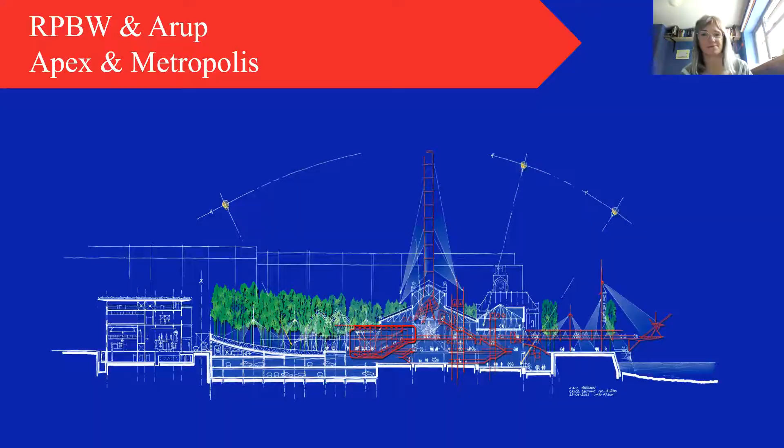As one of our clients was a major shareholder of the Russian gas company Novatek, it was particularly important to him to incorporate sustainability in a really visible way, which then interestingly set up a narrative about transforming an old coal power station, as you can see up here, into something representing the future of energy.

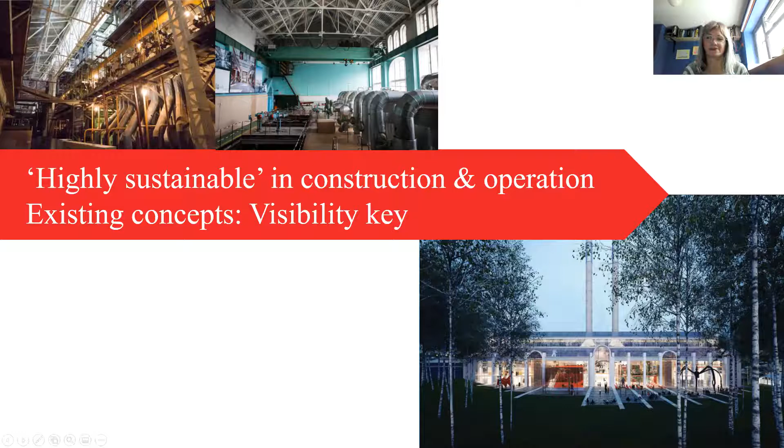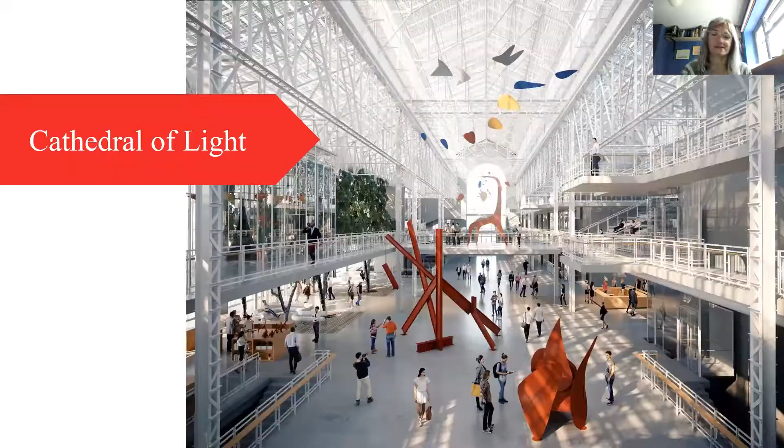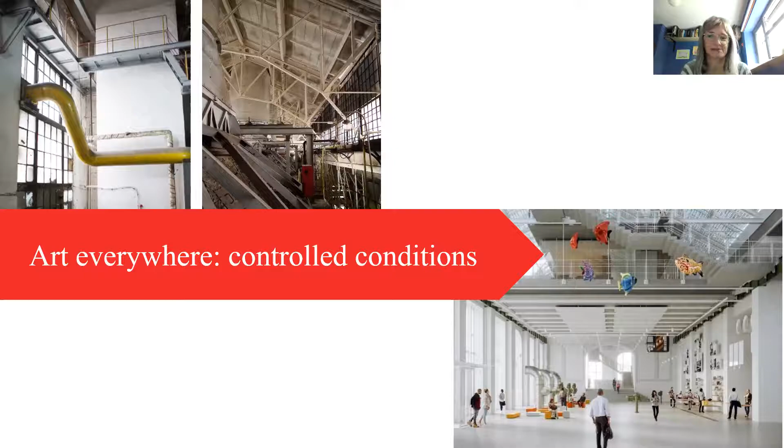So a key architectural concept that already existed from Renzo Piano Building Workshop was to take off the existing roof of the power station and replace it with glass to form a cathedral of light. And the brief was to be able to put art everywhere. Much contemporary artwork is sensitive to environmental conditions and needs a controlled environment to conserve it with constant temperature and humidity and limited light exposure. So this creates a real challenge. And of course, the building's in Moscow, which has an extreme climate with winters that get down to -25 degrees C.

So today I'm going to focus on the broad early stage sustainability and environmental concepts in development in response to the site and the key challenges that I've just outlined. I thought it'd be quite interesting to show you the process responding to existing concepts and then working through opportunities to make them into reality. And then I'll hand over to Andy, who will illustrate some of the more detailed multidisciplinary collaboration that made the concepts really work.

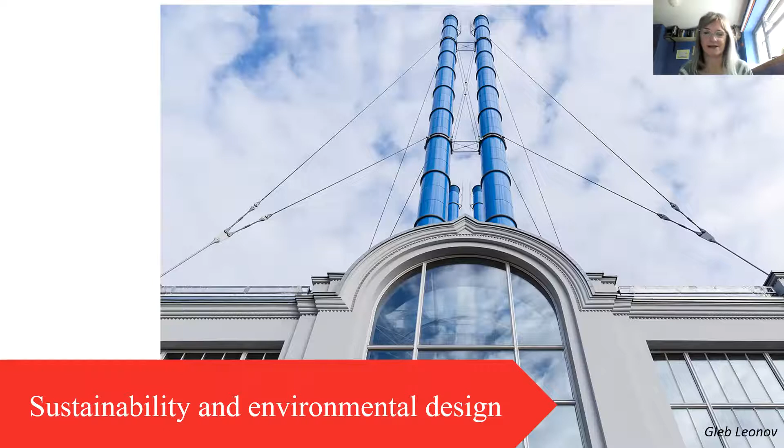So as we joined the team, slightly after everything started, we immediately had to do lots of thinking. How do we make this old power station into a sustainable world-class arts and culture venue? Or how do you minimize operational carbon for a contemporary art center in Moscow built out of an old power station with the roof replaced with glass, which wants to be able to put art everywhere? Quite a challenge. And immediately, after much discussion with Renzo Piano, it was quite clear that the vision of the glass roof was absolutely immovable by both him and the client.

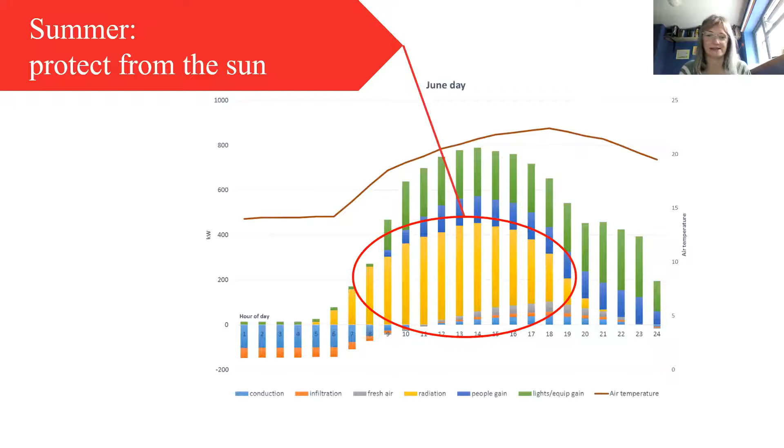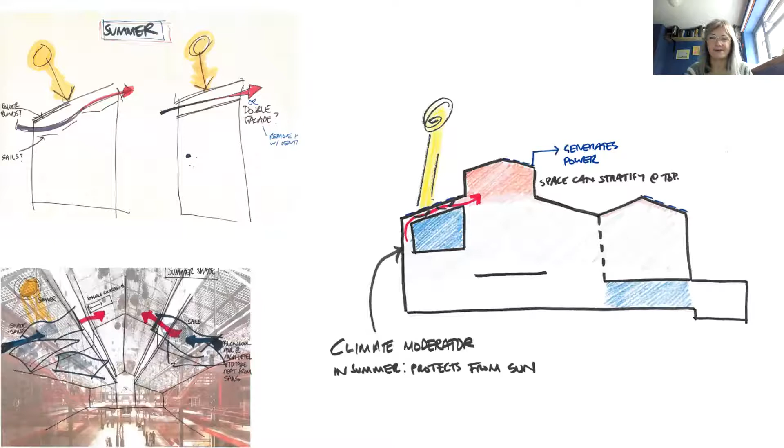So we sat down with a pen and a paper and a little bit of Excel and really thought about what we had here. So in summer, it's quite clear that with a glass roof, the solar gains dominate the design by far. The key is to protect what's inside the building from the sun. How do we deal with the heat from the glass coming from both the sun and the air? Should we ventilate the facade? Can we use the rising heat and the height of the building to help us?

We concluded that essentially the envelope of the main building is a climate moderator, but it can't do all the work. So we thought that putting art enclosures within that main envelope was key to the success of the project. We also needed to think closely about heat rejection, how to capture the useful waste summer heat for dehumidification required for gallery conditions, and also for the hot water for the various different uses in the building. And of course, the large roof area with a significant amount of sun allows us to generate quite a lot of power over it.

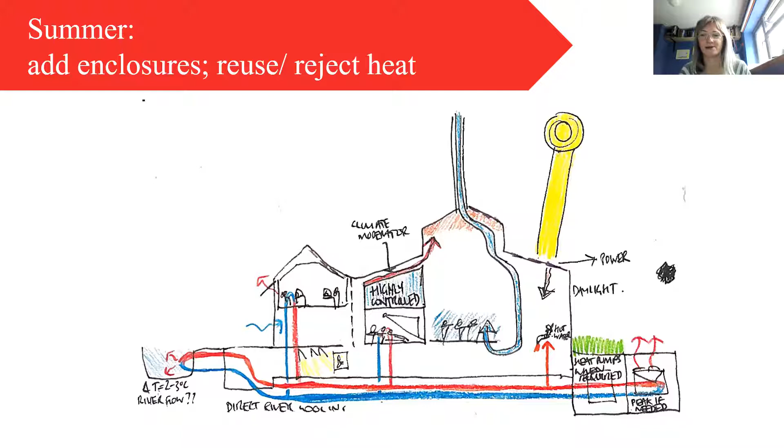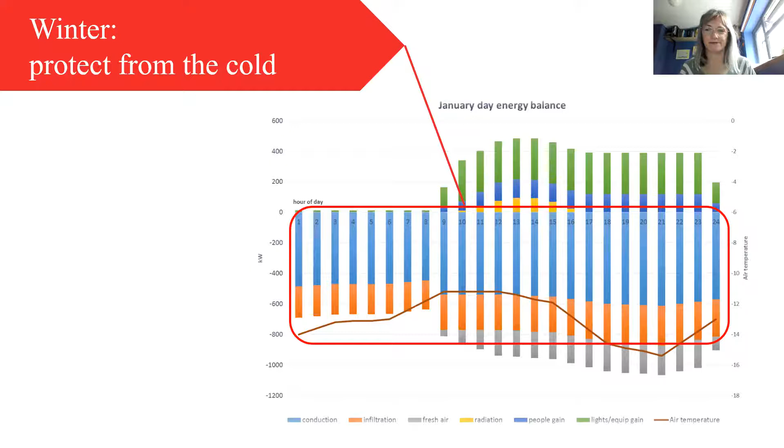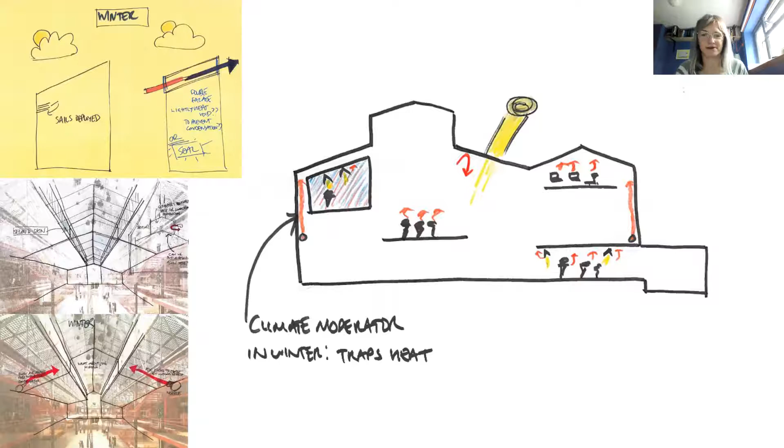So in winter, the most important thing is how cold it gets. The outside air is the key issue. The conduction from the facade and any air leakage losses really dominate the requirements of the building. So any heat we can trap inside is key. And now we want the envelope to work really, really hard to moderate the climate by containing the heat and the moisture inside it. But condensation and comfort are really critical at the outside of the building, where it's -25 outside sometimes, remember. And also this is even more critical if you want to humidify the air inside to protect the sensitive art.

So the heat for the building is a given that it's provided by the city district heating system. So the key really to sustainability here is to use it as efficiently as possible. And again, in the winter, we concluded that art enclosures and an assessment of the wider brief to zone conditions would be key to a truly efficient design.

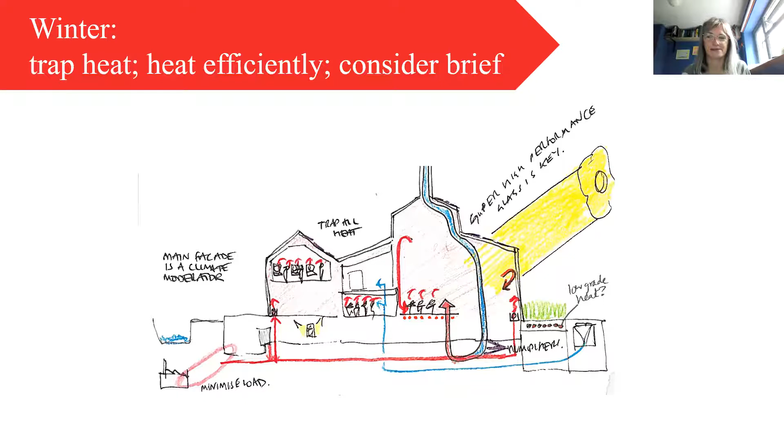Now, putting art everywhere, this really creates a burden of air conditioning in a building this large, especially with the humidity control that you need and the humidification you require in the very dry Moscow winter. This led us to really discuss with the client about the brief and whether they really wanted this. They wanted to be able to borrow other people's contemporary art for shows that would come with a requirement to demonstrate that the environment it was going to be put in would meet the exacting environmental requirements.

And it was clear this is going to be really challenging, highly energy intensive, and not in line with the sustainable brief. And also we even had a question if this is really going to be possible in all locations. So we needed to address this and change the brief slightly to apply limits to where it was going to be possible to put art.

And the other key issue for art conservation is light. Light, as I said, is key to the architectural concept to provide somewhere bright and really happy for the visitors. But much contemporary art cannot be exposed to high light levels for too long, and certainly not to direct sun, even with these shadows. So daylight admission to art galleries has to be controlled to achieve the conservation requirements.

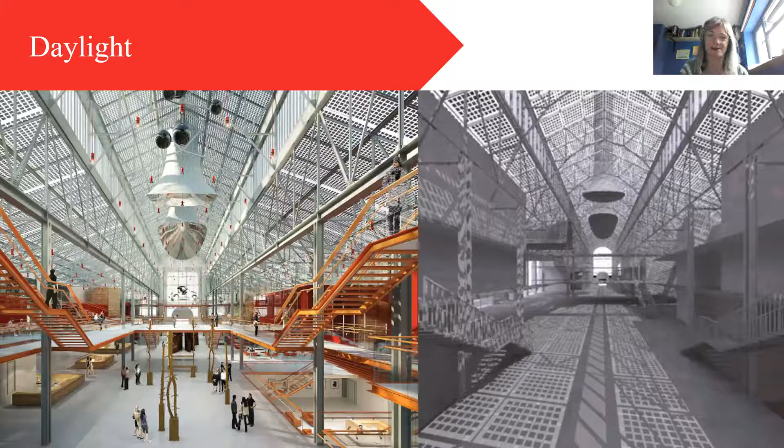On the other hand, daylight allows us to save electric light energy. Our design for VAC uses LED lights with Bluetooth mesh control technology, which allows individual control of each light so that only the right amount of light is delivered, and it's based on how much daylight is available at any one time.

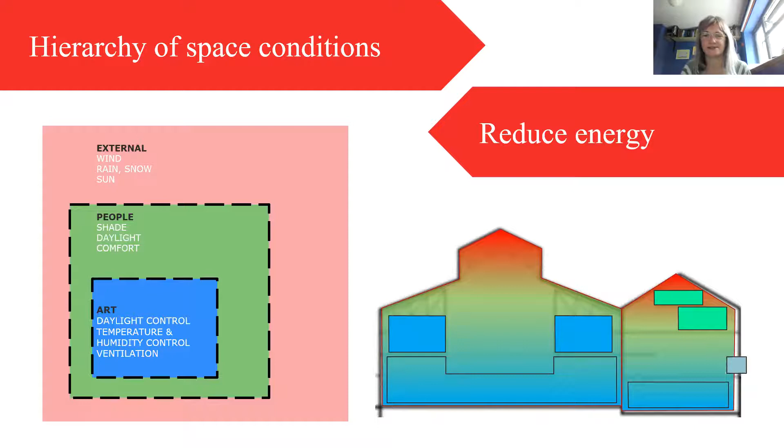So back to that brief. What we did was develop the concept of a hierarchy of space conditions. The main envelope was a climate moderator, and then there were art boxes inside it, meaning that we could, in most of the space, just provide comfort conditions for people. And then within the art zones, we could control them to much closer conditions. This means that we reduce the amount of area and also potentially the amount of time that we need to control to such energy intensive conditions.

So to do this, we defined 3 different space types in terms of light levels, cumulative light exposure, temperature, and relative humidity. The sensitive display type G1 has very low light levels and a very tightly controlled temperature and humidity band. There's an intermediate gallery type, which has daylight and slightly wider conditions. And then the rest of the building can show art, but it must be insensitive.

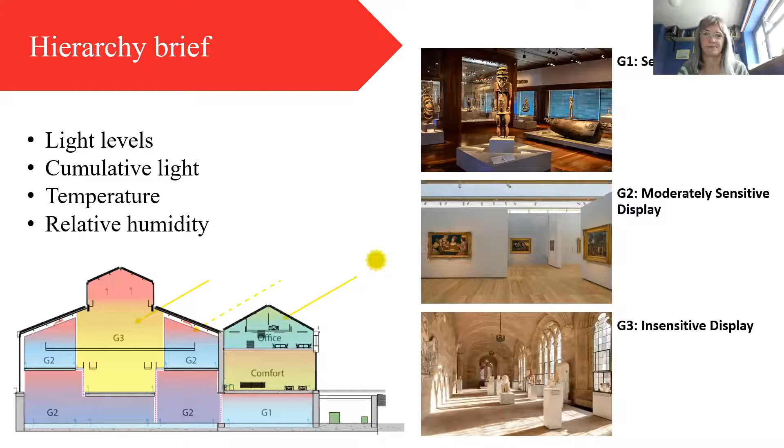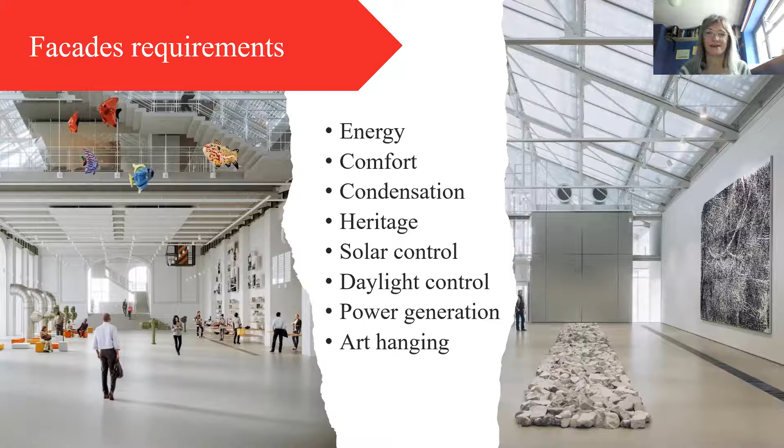So the facade of this existing building has an awful lot of work to do. It has to reduce energy consumption, provide comfort, prevent condensation. Also, the building was listed, so we had a heritage requirement. It needed to control the sun, to control the daylight, to generate power, and also to hang art on the inside of it. It's a very hard-working facade. And as a result, it became quite a layered system with all of its own challenges that I'll be leaving to Andy to tell you more after this.

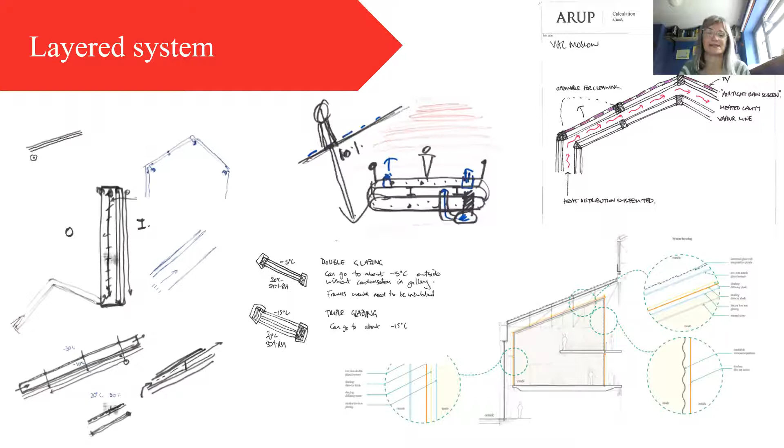It's interesting to understand that we actually didn't fully insulate the existing solid walls. This is partly because they're 1 meter thick, which actually gives them U values quite similar to glazing, and they form a relatively small percentage of the whole building. The window and the roof performance really dominate the overall. We couldn't insulate them externally for heritage reasons, and insulating them internally created potential issues with freezing of the existing brick due to the high levels of internal humidity.

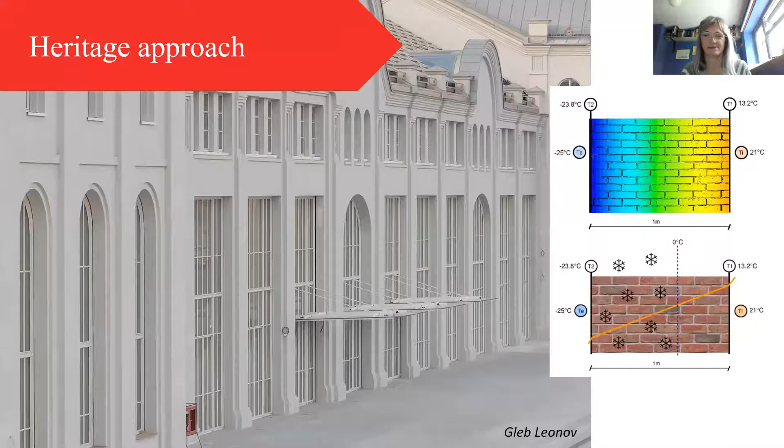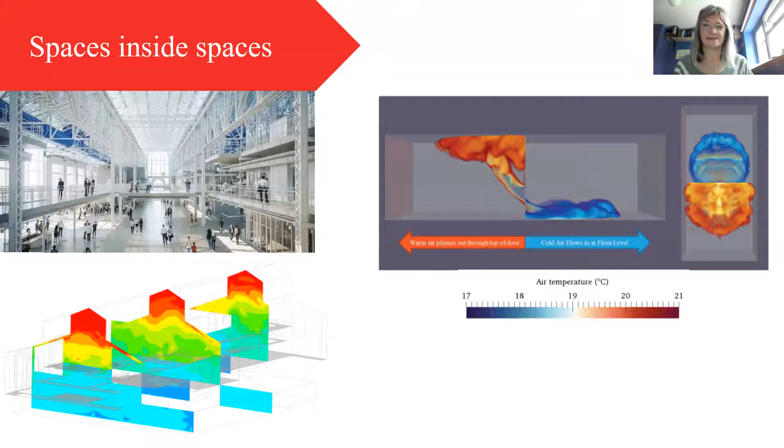The large open area has a large range of conditions. You can see the image on the bottom left showing the stratification of the space in the summer. The concept of having art spaces inside this created its own challenges. One interesting one to show you was the potentially large environmental changes at internal doors. And we looked at how much impact this would have on the galleries when doors were used. This analysis allowed us to provide guidance for where you located sensitive artworks, meaning that you didn't have to have additional lobbies.

So the chimneys, this is a nice story to give you a sort of flavour of what happens when you come to a project not quite at the beginning. The previous consultant had proposed turbines at the top of the power station chimneys driven by natural ventilation. So the power station chimneys themselves are quite interesting. You can see the original ones made out of brick, and then later steel. And originally Renzo Piano Building Workshop were intending to keep them, but actually they eventually ended up replacing them.

So the turbines driven by natural ventilation were definitely not a good idea. Natural ventilation is not great for art conservation or climate control in Moscow, and actually they really weren't going to generate very much power. So the next idea was to put wind turbines at the top of the chimneys. These were quite desirable to the client because they were quite a visible, sustainable technology. But putting a wind turbine at the top of a chimney of an occupied building with a glass roof creates maintenance issues, a risk of injury from blades falling, which is a real problem. And then also they really don't create very much power, so it wasn't a great plan.

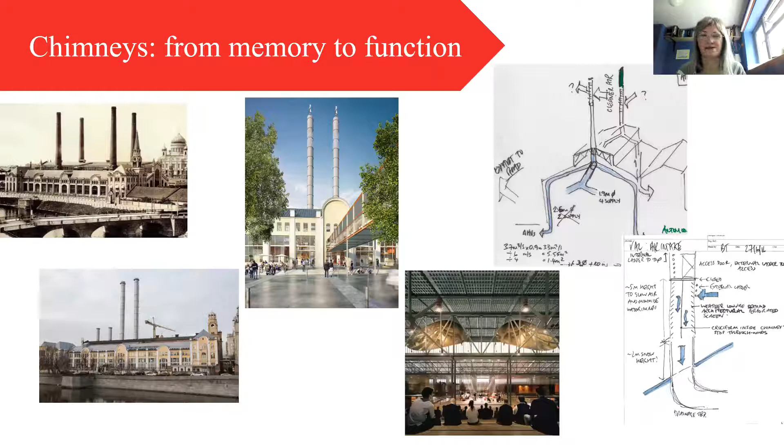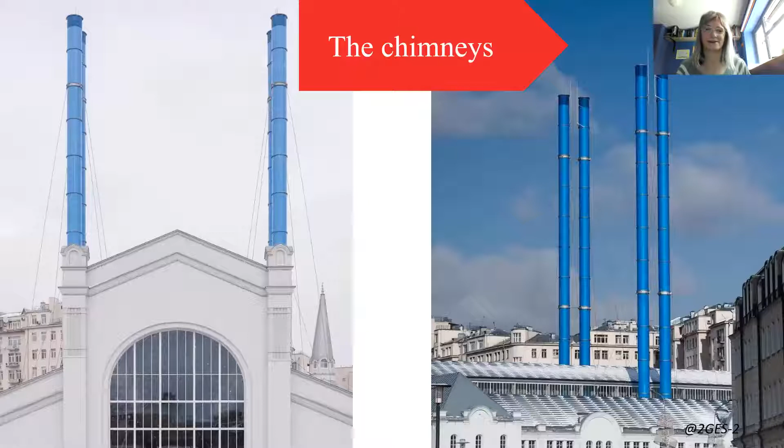But these chimneys, as I said, are quite an important part of the architecture, and it was quite important that we tried to make them useful. So in the end, what we did was we used them for air intakes. They take good quality air from above the polluted air in the center of Moscow. And here they are, the new chimneys. You can see they're really important aesthetically as an icon of the building. And actually they do generate much healthier air. And if you look at the GES-2 Instagram, you can see that they really are quite emblematic of the building.

So in summary, for the design, what we tried to do was do things that really actually were sustainable as well as being visible and truly made a difference to the performance of the building. From an already energy efficient baseline, we made approximately a 38% reduction in energy consumption with the measures I've described. Quite difficult to calculate carbon because the district heating supply in Moscow doesn't have that information available. But the biggest step change we made was changing the brief not to have art everywhere, and then improving fabric, capturing reject heat from cooling, and of course the solar power.

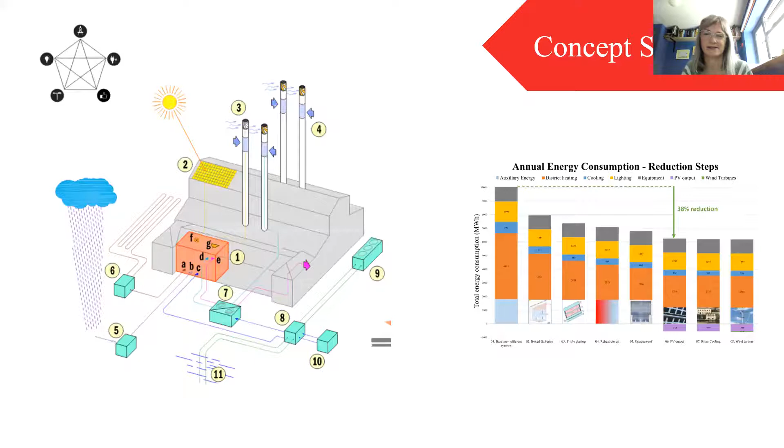We are on track to achieve LEED Gold, which in the context of the Russian construction industry in 2016, when we started this project, was quite a radical thing to do. It's quite important to the client to have an internationally recognized standard, a sort of badge for his building. Although again, because we weren't involved from day one, this was trickier to achieve than it would have been if we'd been on that journey right from the start. It's been quite challenging to deliver this because the delivery team were not familiar with it, and there's a language barrier between the LEED process and the engineers working on the job to deliver it.

So I guess the most positive story about this is how important it's been, because the client is really invested in the outcome and to get this badge for the building. And we remain involved in checking and upholding the sustainability design concepts all the way through to delivery, which means that they actually have to get delivered. And in the end, as well as the 38% energy savings I described, the building is doing pretty well because it saves 55% of the existing fabric. And it's actually added a lot of biodiversity that you can see here to an existing industrial site. There's a whole birch forest being planted. It's also got a large sustainable urban drainage system and rainwater recycling.

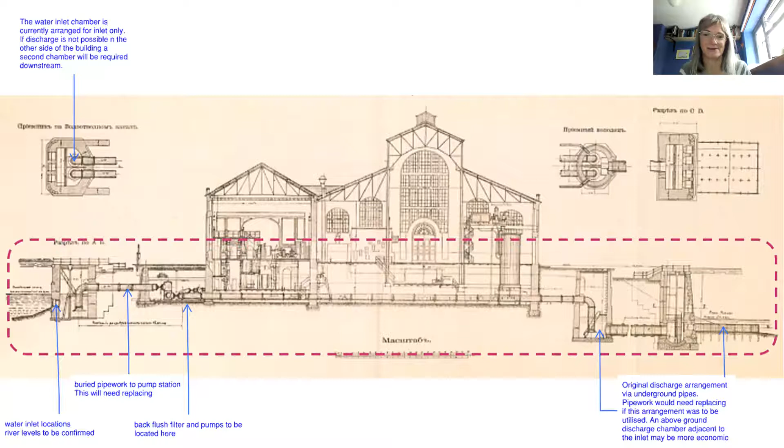One of the design concepts that got away that I thought would be quite nice just to show you was we looked at trying to reuse the power station cooling infrastructure, because the building sits between the Moskva River and the Vodootvodny Canal, but this proved impractical to do in its current configuration. Essentially, the water used to run right through the power station. But I thought it'd be just quite nice to share this historic diagram. We did try quite hard. We were quite excited about this concept at one point.

So thank you for listening. That was essentially what happened right at the beginning of the project. And now I'll hand over to Andy to show you what happened next. Thank you. Thanks very much, Becky.

I'm Andy Mackay. I also work for Arup in the buildings team, and I led the Arup multidisciplinary team from scheme stage through project and tender, which are Russian design stages, right through to our start on site. And I'm going to talk to you a little bit about delivering some of those concepts that Becky described, and particularly focused on the creating of the galleries.

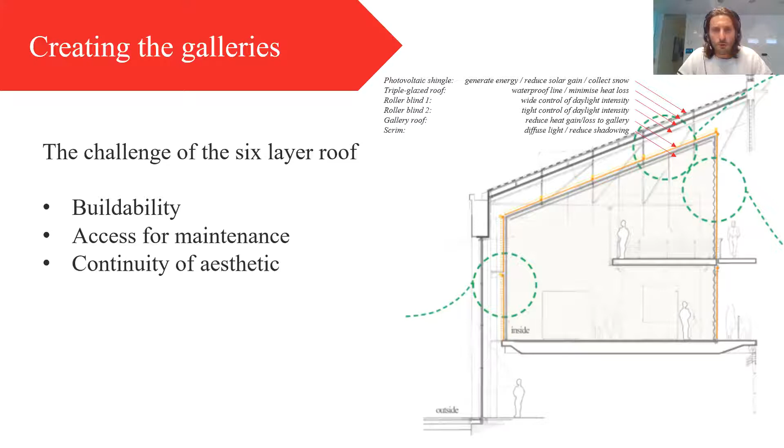Becky described the challenges of having the galleries open to the internal atrium of the building and having it all one space. So we created this box in box scheme that Becky described. But as we entered stage 3, the project stage, we got more and more trapped in this difficulty of trying to deliver this detail. It led to lots of challenges. I think number one was really the buildability of it.

So we ended up with this 6-layer roof, all trying to do multiple different things, and building that, suspending that below an existing roof, and then creating a neat interface with the partitions that we're trying to build made that very difficult, especially when we were looking at temporary partitions that could open and shut. The roof itself was working really hard, so we needed to access the bottom of it to get to all of the various different components that live underneath the roof. So making that void in between the two roofs became very difficult.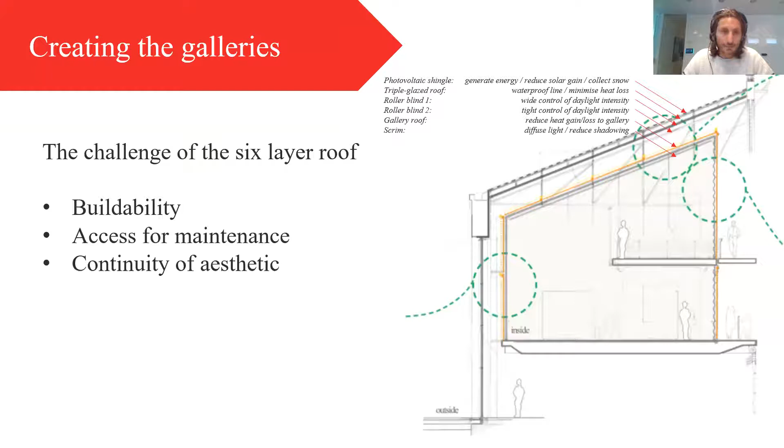And Renzo Piano Building Workshop also found it very difficult in terms of understanding the aesthetic of how that roof would look and how that would feel, going from the cathedral of light that you saw many pictures of in Becky's presentation, and stepping inside into something that felt much more enclosed. So we really wrestled with these details for quite a while, and at the same time we were working quite hard in our facades team with the local engineers in Moscow, who were leading the facade cleaning and access strategy.

And as you can imagine, roof clearance of snow is a really big challenge in Moscow. It doesn't snow an awful lot. It snows probably 5 or 6 times a year usually, but it snows very heavily when it does snow, and then because it's so cold, it doesn't go anywhere. So you have to design very carefully to work out how you can get snow off your roof, or you have to design your roof to allow it to stay on there. And neither of those were particularly easy to achieve.

So we were exploring all these different ways of getting people up onto the roof, and we were finding it very difficult on top of a glass roof to make it safe, to avoid them damaging the roof, but also we wanted that snow to be cleared off very quickly, because the roof is such a key enabler of our building. With the roof covered in snow, it's not bringing light into the building anymore. Which is a real central part of the philosophy of the building, that cathedral of light.

People come in from Moscow and from the dark, cold spaces that generally exist, and really enjoy the warmth and daylight. So that element got away when the roof is covered in snow, and also the roof is covered in photovoltaic cells to generate energy, and as soon as they're covered in snow, they're not generating any energy either. So we needed to get rid of snow, and we just didn't really know how to do it.

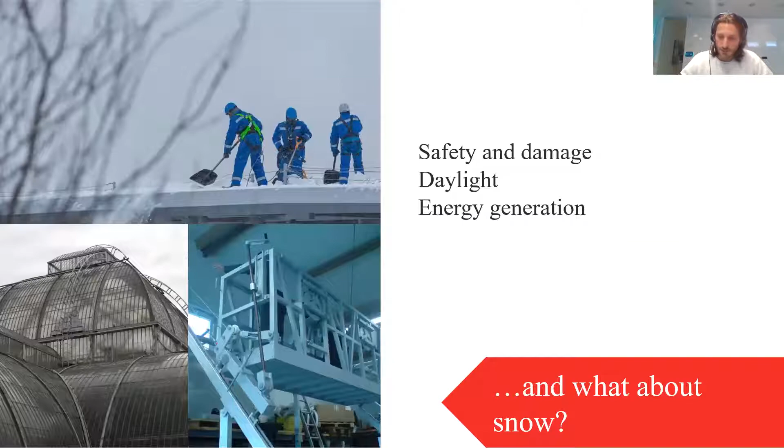So having wrestled with that challenge for a little while, it was time for the Renzo Piano annual summer break. So they shut the office in August, similar to a lot of places in Europe. And Renzo gets tired of his life by the sea in Liguria and heads off to the Italian Alps to reflect. And when he came back, he had decided that the Madonna had spoken to him, and actually the compromise of the box within the Cathedral of Light was a step too far, and that actually it was very, very important to the concept of the building that continuity of that glazed roof continued inside the galleries.

So when the Arup team heard about this, there was a bit of a sucking of teeth, and oh, I'm not sure about this. This is going to be very hard to achieve now. But at the same time, it unlocked a lot of the challenges that we'd been struggling with, and that we'd creating that secondary roof. So we still needed to keep that compartmentation.

It was still a separate space from the rest of the atrium, but those partitions wanted to go all the way up to the roof, and so you can stand inside the gallery and look up at that glazed roof and see everything working, and see that heritage structure of the roof. So the roof was working hard before, and now it's going to have to work even harder.

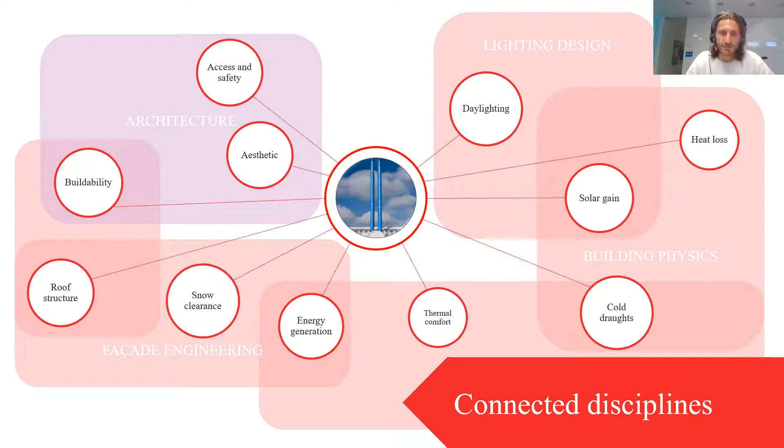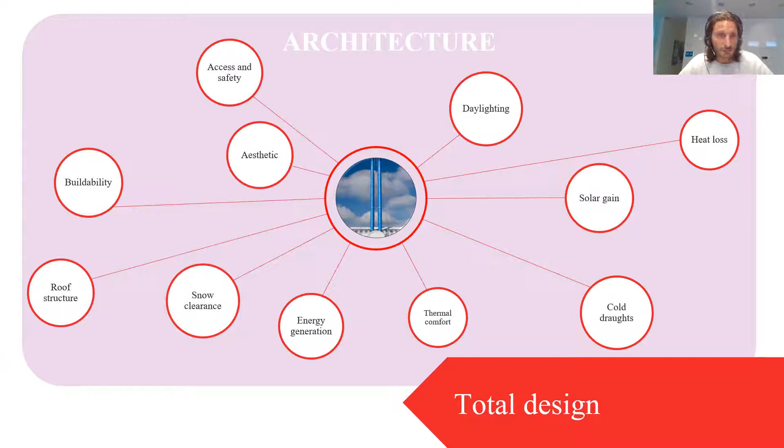But what worked very well in the project was this approach of total design that the whole design team bought into. So I think it helped that Arup were delivering a lot of the disciplines, but Renzo Piano were very engaged in this as well, and really wanted to bring everyone together to try and solve all of these problems together. So a real total design approach to the architecture. So we got the pens out, and we looked at how we can get this roof to work.

And what was really important was that shared understanding that we needed. So all of those multiple disciplines, when they needed to talk to each other, we needed to work together to understand what each person, each discipline needed to get to in terms of the design. And then when we had reached that shared understanding, it was time to go back to first principles and really analyze exactly what each component needed to do, and not just what it needed to do for you, but what it needed to do for the other disciplines.

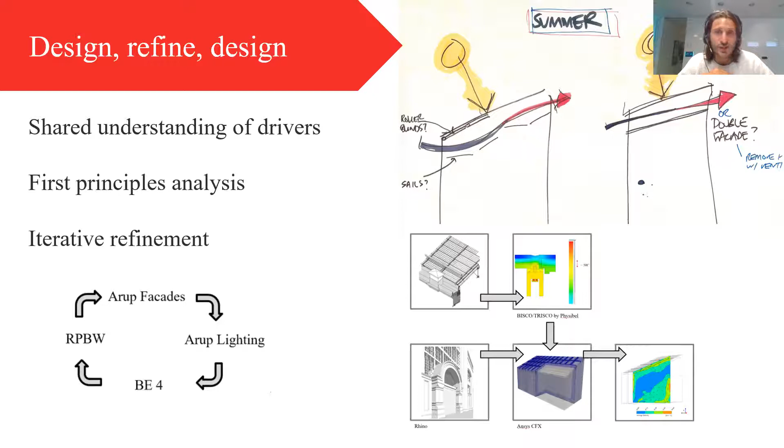And so looking at all of those elements of the roof holistically, and then iteratively working through different options and seeing how each of those options affected everybody in the design team. So we used a variety of different software tools and analysis tools that we all then had to share back into a common environment. But really, it was all about buying into that strategy of everyone having to work together to get this to work.

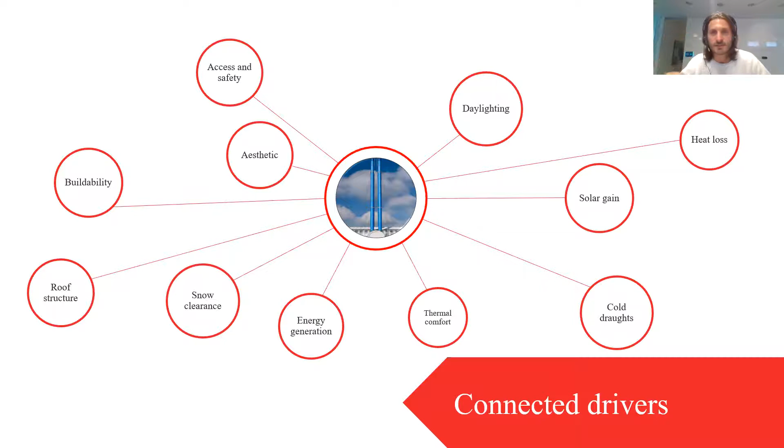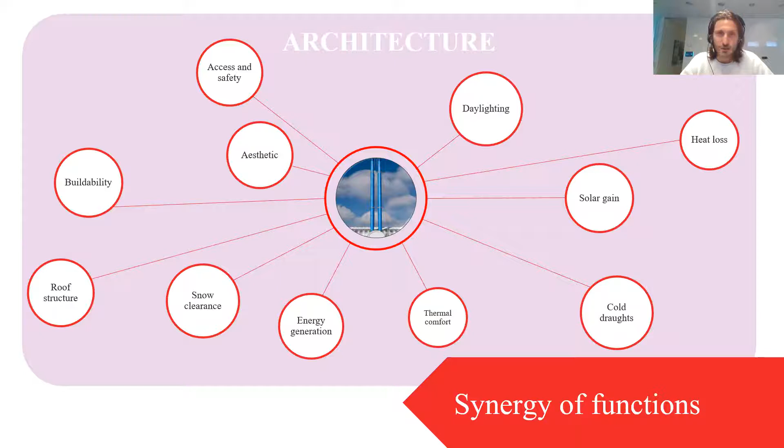So as we went through this process, it became clearer and clearer that all of these connected drivers that originally gave us this sucking of teeth of complexity actually also offer these opportunities, in that so many of these requirements also deliver solutions that have other functions. So the synergy between these different requirements and the different solutions actually allowed a simplification and a reduction of the components that we needed to get that continuous whole.

I'm going to talk to you about a couple of specific examples of where that was particularly true. And apologies, I'm a services engineer, so these are a little bit building physics focused, but I think they're quite interesting and quite reflective of the whole process in general.

So first one is the scrim. So the scrim is a bit of jargon, I think, but what the scrim was there for is it was essentially a woven screen that was put up against the roof, and its original function was really to diffuse the amount of daylight that was coming through, partly to reduce its intensity, but also because of the photovoltaic cells that were on the outside of the roof on that top layer.

There's a lot of patterning on the floor of the gallery, which is visually disturbing and also risks damage to the art in terms of a variation of intensity across the art. So the voile screen diffused that and reduced the amount of patterning we had.

But as we looked into that component, we realized actually this is going to have a beneficial effect on the surface temperature. So when you're standing on the floor of the gallery looking up at the roof, you're going to feel cold if there's nothing there, because the surface temperature of that roof is going to be so cold it's going to create a temperature asymmetry and create discomfort. But the voile screen balances that, or rather increases that surface temperature.

But something that also came out of that analysis was we realized that we were having these big problems with drafts that I mentioned earlier. So we had the cold surface up on the roof and warm surface at the bottom of the gallery, which was creating this circulation. So we had a continuous circulation of air at a velocity that was too high for us to be able to be confident that the art would be protected.

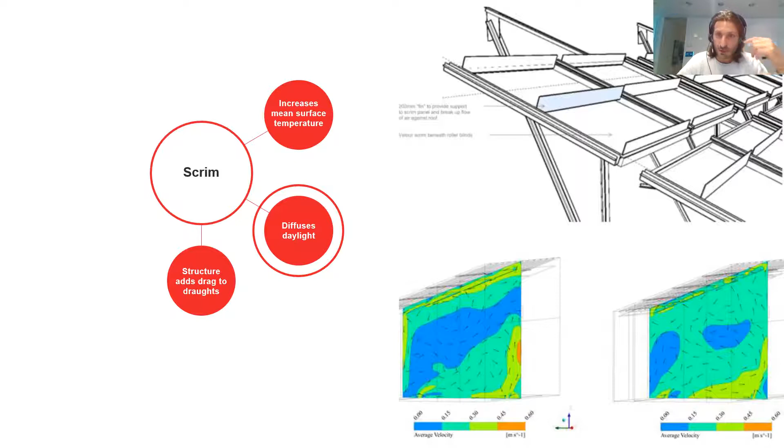The air was running down the back of the scrim, but what we realized actually is it's coming into quite a tight channel, and if we could just reduce the velocity of the air physically while it was going through that channel, we would be able to create enough drag that would break up that circulation pattern. So we looked at the structure of the scrim, and as you can see in that top right diagram, we expressed the fins that were holding the scrim, the velour, onto the screen.

And by creating enough resistance to that airflow, we broke up the air circulation patterns. And you can see on the bottom right diagram that the air velocity was much reduced, and we got to a point where the art conditions were satisfied.

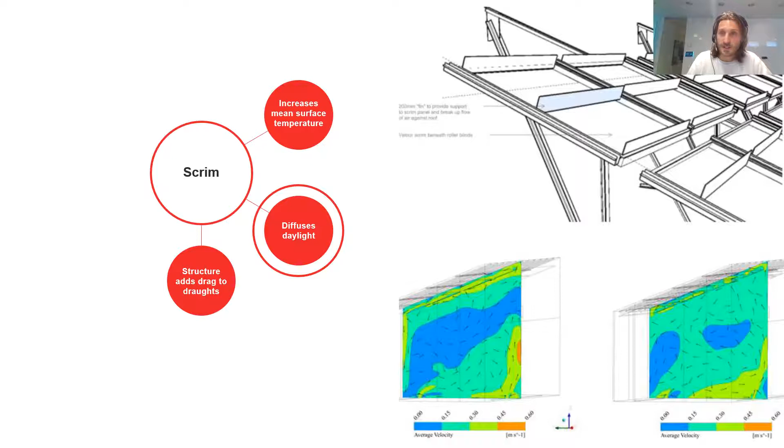Another example was our trace heating. So as you can imagine, we needed to put an awful lot of heat into this building to keep it comfortable. And one of the key ways that we delivered heating was to the roof, and the main reason we were doing that again was to reduce those drafts. So we looked at ways of integrating trace heating. So it's like a strip of electrical cable that has a conductive sheath around it that allows heating to travel along the length of the cable.

And so we introduced that into the structure of the roof, which heated up the roof to the point where the surface temperature wasn't creating those issues with the drafts. We were a bit concerned about energy penalty at this point, but what we realized was that actually it was only required at very extreme conditions. So I think we got to the point where when it was below -20, it was time to switch on the trace heating, but for the majority of the occupied hours of the building, the trace heating didn't need to operate. So the energy penalty was slightly lessened.

But when we looked at the effects of the trace heating, it had the benefit of increasing that surface temperature and improving comfort, but actually it had a real benefit in unlocking the facade, the roof design, in that the thermal bridging detail of the roof was extremely challenging. We were looking at quite sophisticated roof systems to get that to work, because as Becci mentioned earlier, condensation is a big risk when you have a temperate gallery and a very, very cold outside air temperature. So the thermal bridges had to be perfectly designed to avoid any risk of condensation.

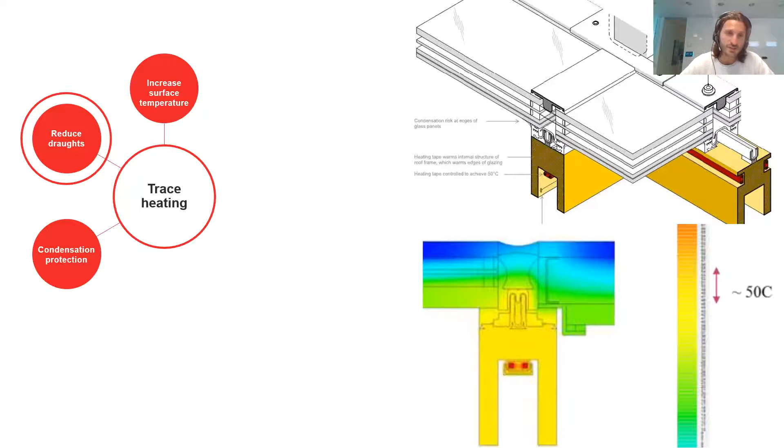And then I want to talk to you about the photovoltaics as well. I think we've mentioned them a couple of times, but we've not really talked in detail. So the photovoltaics had a really key function to us in that obviously they were generating energy, and it was a really nice story for the building in terms of moving away from the old fossil fuel power station through to a new renewable, future-looking power station, if you like, that was generating its own energy. And so that was exciting to the building concept.

But actually, it was also fundamentally important to us because the photovoltaic cells actually provide shading as well. So when you saw the pictures that Becci showed, it still feels extremely light in that gallery, in that central atrium, in the nave we call it.

But actually the roof is covered by 90% photovoltaics, but because the amount of glass that still surrounds that allows enough daylight into the space to really feel extremely well lit. But that 90% reduction in light was really important to make it less visually uncomfortable, but also significantly reduced solar gain. So we were able to keep the spaces more comfortable in the summer.

But I want to go back to that snow problem that I kind of teased you with earlier, but didn't really talk about anymore. So we were still wrestling with this problem until we realized actually photovoltaics are just one element of an electrical system. And actually, instead of using them to generate electricity, you can also use them to emit heat by reversing the current in the photovoltaic cell and sending energy back out to the photovoltaics. So we thought, well, when we're covered in snow, we're not generating any energy, are we? So why don't we send energy back up to the photovoltaics and melt the snow?

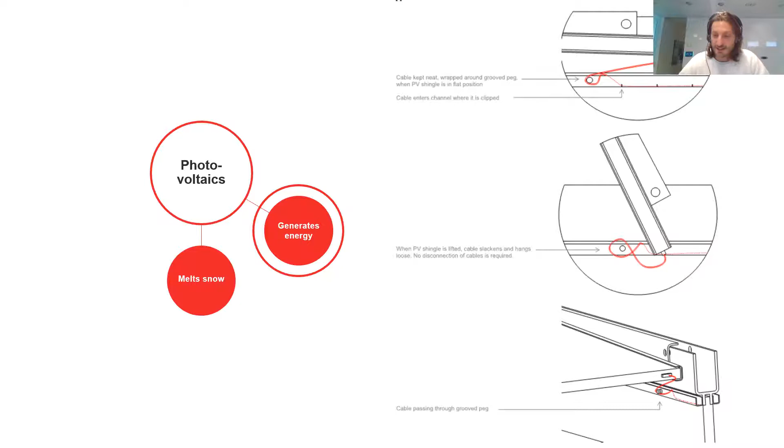So when Becci says we delivered the concept design principles, I think there were elements where we went a lot further than that, and I think the benefit was really felt by the time we got to the end of the roof design process, and we really had this one coherent roof system that worked consistently for the galleries, for the nave, for that central atrium, and throughout the building, and delivered everything that all of those different disciplines needed it to do.

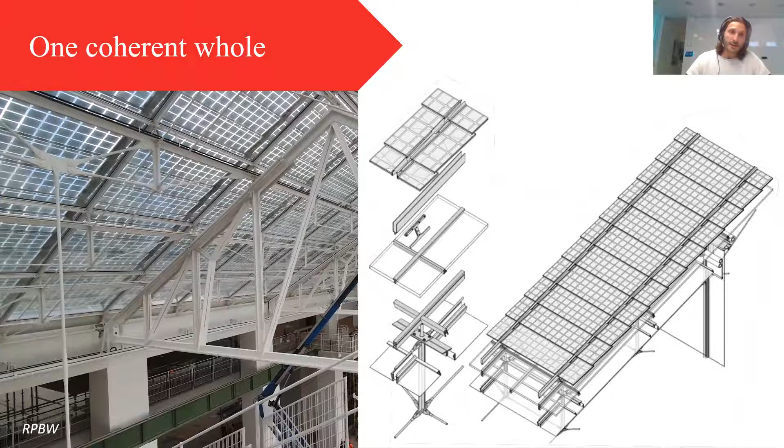And I think there are 2 key ways that we really delivered this. And the first method is something that we're all getting better and better at, our use of technology in design. So we share 3D models, and we work in this 3D environment. But one thing that was really important to us was the ability to use that 3D environment to use our analysis.

So for example, we took Renzo Piano's Rhino model of the building, and we imported that into our building physics software that was then used for finite element analysis by the facade engineer to check the surface temperatures of different elements and different thermal bridges, which we then fed back into our CFD, our computational fluid dynamics model, which allowed us to understand how the air flows within the space. And then we could iterate that back through to say, actually, it doesn't quite work like that. We need to, for example, add more depth to the fins that are on the scrims, and we could then feed that back round, and it worked very well, all working in that data environment.

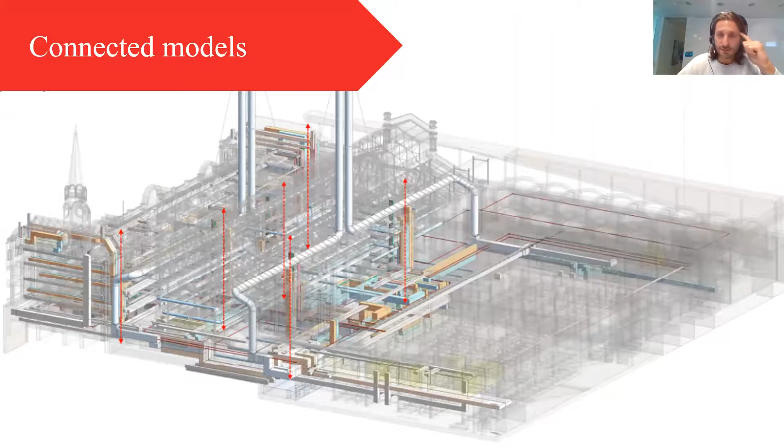So that was one element, but actually I think what was most successful really was the human connection element on this project, and it was a very diverse project team in terms of where people were based. So obviously Arup, Becci and I are based in London, and then we were working with the Paris office of Renzo Piano, and then we had our specialists in Moscow. We also had a structural engineer from Italy, but it was very important to us that we could all come together and understand those different drivers and get through that total design process. And this is a photo from Renzo Piano's basement in Paris.

You can see a bit of some samples from the roof PV panels in the background there, and you can see lots of different sketches and diagrams and lots of people working very hard. But I think what's quite interesting is that actually there isn't a single person from Renzo Piano in this photo. They're in the room, they're there, but what was really successful is that they enabled all the people to come together and work together to understand and create this total design philosophy.

So you've got an Italian structural engineer talking to a Russian services engineer about a detail, while you've got an Arup acoustic engineer earwigging a little bit in the background, while a Russian architect looks on, and everyone's working together and understanding and drawing and sketching, and that working in that one space was very successful for us.